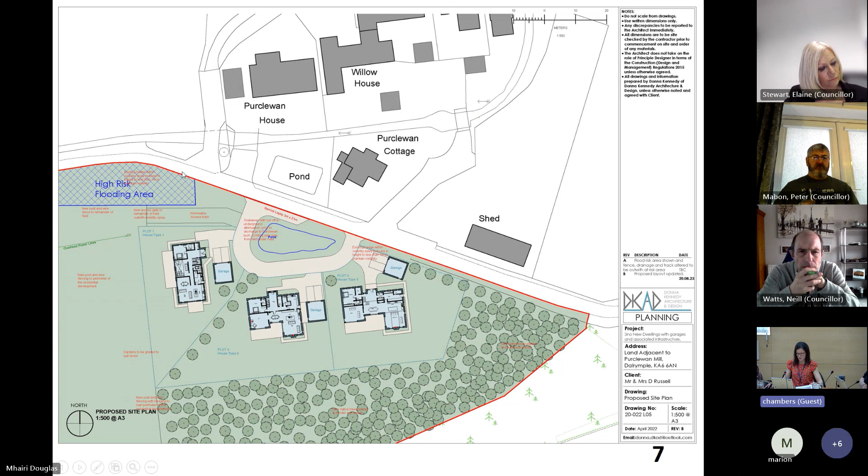Each application should be considered on its own merits, but it is noted that the plot sizes and footprints are smaller and sited at a lower elevation to the road, generally relating better to the existing cluster at Purclewan Mill.

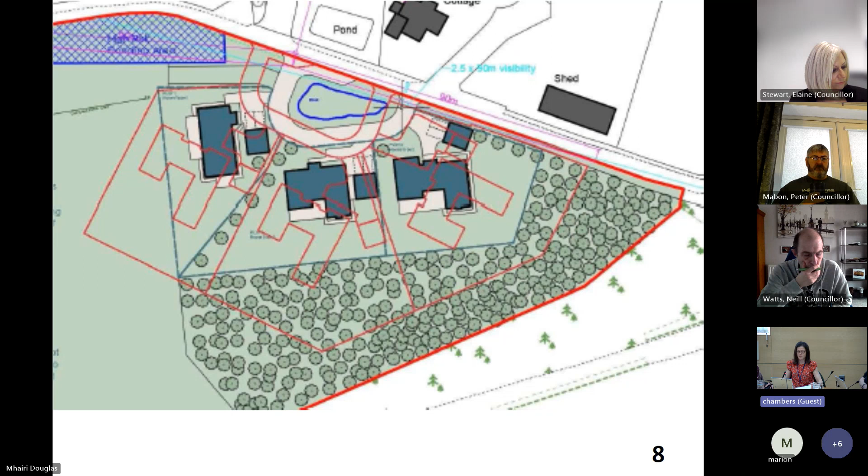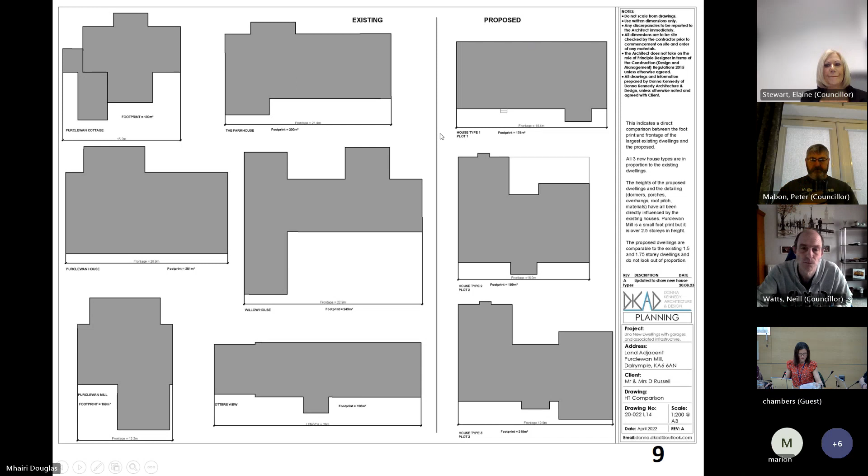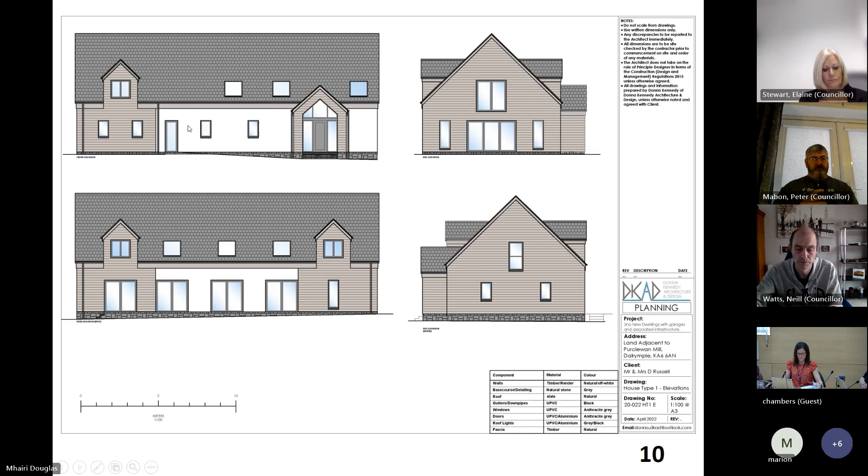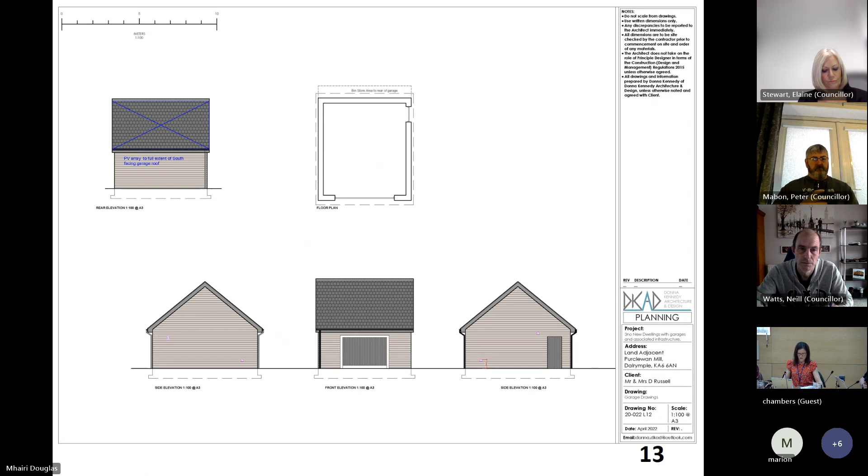This just shows the garage which is proposed to each of the plots.

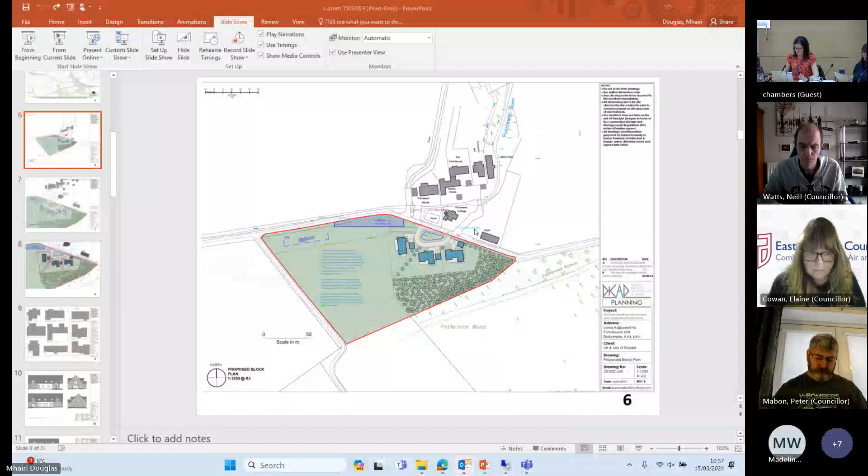This is the application site. Some objections were regarding the size of the application site — it is a very large site, outlined in red. However, the plot boundaries are those outlined in blue, which is a lot smaller than the application site itself, and this remaining field would remain in agricultural use. So it doesn't prejudice any future proposals or mean there's more chance of planning permission being granted for more houses. It simply seems to be the way the application site's been drawn, based on what was previously drawn, as the applicant says.

You can also see this is the area of the SUDS. It's proposed that surface water coming into the plots from the field would be trapped and drained along the boundaries, and surface water from the hard surfacing of the plots would also be trapped and drained. The water would go into the SUDS pond and eventually drain to the burn.

So SEPA Flooding have been consulted on this. They are content with this, subject to the final detail of it. The discharge rate would have to be limited to, I think, 4.5 litres per second as a flow rate going into the burn.

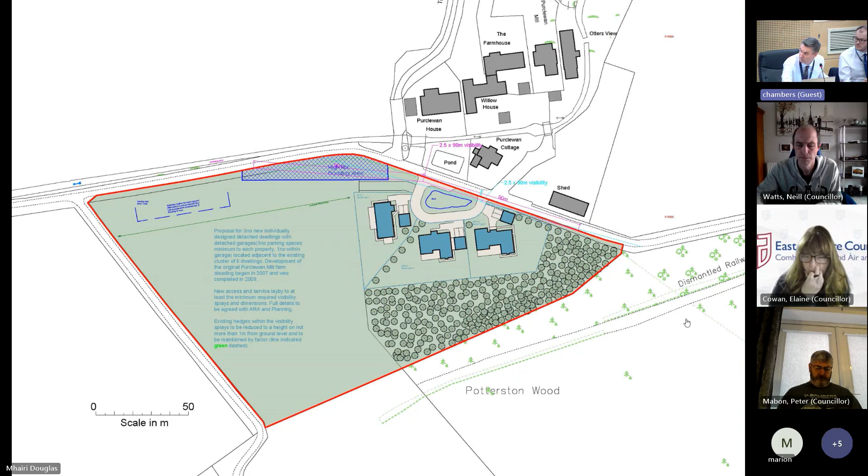I think that probably covers most things I wanted to say. So yeah, that's it for me. Thank you. We'll just hand over to our colleagues, maybe a couple of minutes to get through that. Yeah, thank you, through you, Chair.

On the speeding on the road - if there were fatalities or near misses, we would have been notified by Police Scotland. We haven't got any data to indicate that. If you mention it getting up to a speed of 60 miles an hour, I can't see it getting up to that speed, but what we can do is put a speed survey in. The speed survey will indicate it, and if it does show excessive speed, we can put in traffic calming measures, should the application be approved.

So we haven't got data to say that there's been any near misses or fatalities, but if there were any fatalities, we would have been advised by Police Scotland to put traffic calming measures in. Again, we can put a speed survey out to monitor it, and if it shows excess speeds, we can organise traffic calming measures to be put in to reduce the speed.

Regarding the flooding, colleague is correct. It is a positive drainage system that will reduce the flow, so we have no objections towards that. I did note about grit boxes. We have got community grit boxes, so the community can apply to get the gritting boxes put out, so we comment there. But other than that, we are happy with the application. We've got no further objections.

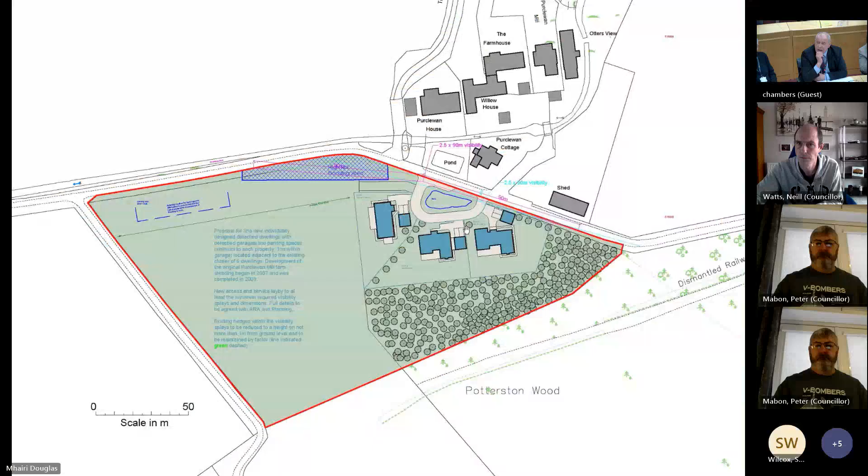I was disappointed to see the site visit had been stood down the other day, so I took the advantage to nip in myself, and I left it to night time just as it was getting dark, and I stood. Could you put the site up again there, please? The closer one, if you can. I think you've got one that's closer than that. No, there was one earlier on. I think it was the one showing the site before and the site now. That one. Did you bring that down a wee bit, actually? Oh, you can't do that.

Basically, I was standing there on house number 2, and I was looking back, and the nearest cottage is Purclewan Cottage, just the one you can see at the very top there. And I guess the lights were on them both upstairs, and I think the one to the left is actually a bathroom, and the one to the right is a bedroom with a balcony on it. I could see people in both of them. So that privacy issue was a thing for me, and especially at night time, I could see it much better when people were actually in the buildings, in their rooms.

Thanks, Chair. Purclewan House added a Juliet balcony recently, maybe about 3 or 4 years ago, so they will have open views there, but as you say, they might not have curtains up at the moment because they've got no neighbours as such, but they do have a big glazed area that they can look out of. If I can add to that, the separation distance between the houses would be more than sufficient in any normal situation, even in an urban environment, in terms of window to window distances. So in terms of actual privacy impact, that in itself wouldn't be an issue for us.

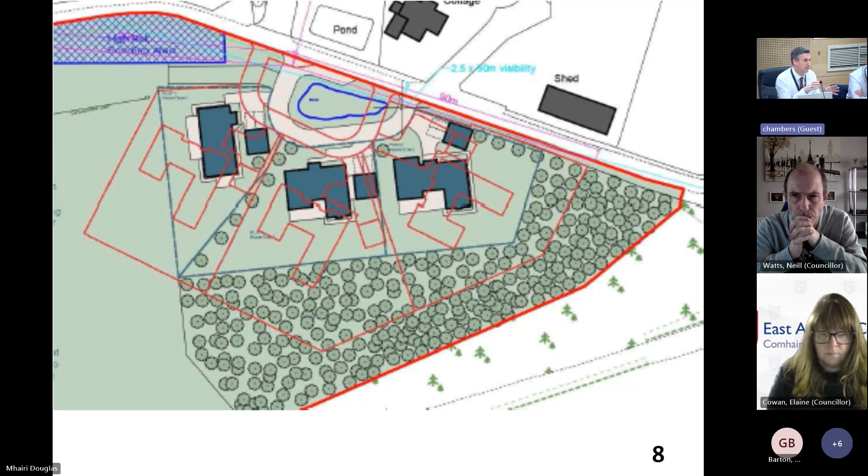Thanks, Drew. Just on the site visit, Councillor Wilcox, that's a proposed date in the diary, and it's kept there as a holding date, and if any committee member asks for it, then we go ahead and book that, but there was no request come in, so it wasn't really stood down as such.

Thank you. In relation to Purclewan Mill itself, it is very much an old steading that's been done up, and it is very close together, and there are no spaces for new builds within that area. The area that you're proposing to say is an extension to the hamlet, it's essentially a new build, not essentially part of Purclewan. What we're looking at is actually 3 new builds which are purporting to be part of Purclewan Mill, but they're separated by a road, and there are clearly definitions there.

It really is part of a new build, so I would suggest that a site visit would perhaps be in order so that people could get a handle on exactly the layout of this, because it is at this moment agricultural land. From the B742, there will be a visual impact on the rural area. And as I say, I don't see it being part of Purclewan, I see it being 3 new build houses. And I would second that, Chair.

So, Councillor Hogg, you were asking for a site visit, and Councillor Wilcox, you. So we've got that on the table at the moment. Chair? Yep. Why was there no visit? Nobody wanted to go. So nobody wanted to go. Why do you want to go now?

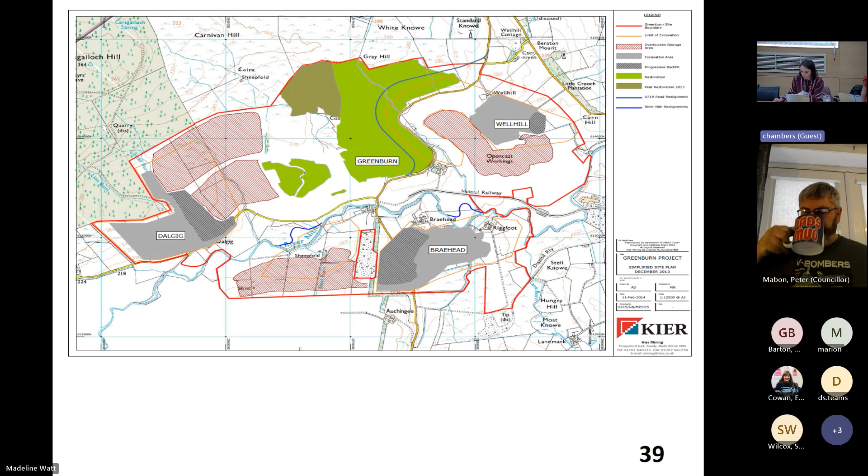Here we can see the location of Greenburn coal site outlined in red, with the 3 areas: Dalgig, including Greenburn, Wellhill, and Braehead to the south of the road.

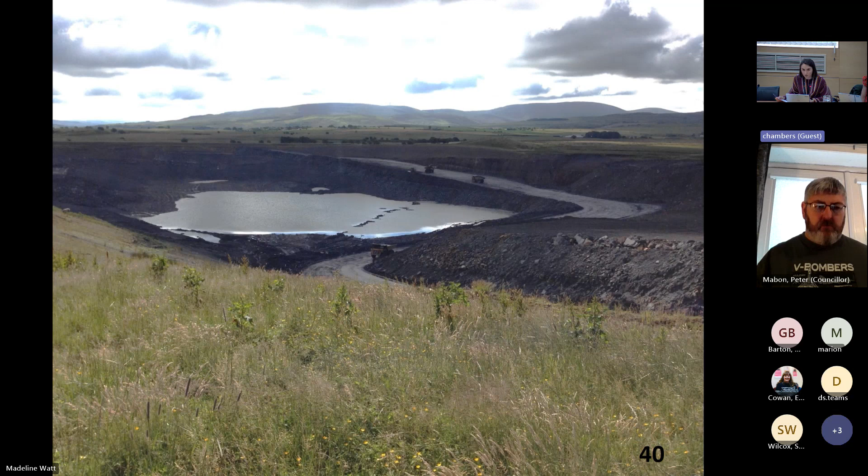Moving on to some photographs. This slide shows Braehead Void in 2016. Coaling was suspended here in 2015 and the area was restored between 2017 and 2019, the results of which we can see here. The void was infilled and the final landform, relatively flat at 197 metres AOD, was completed in 2018. The area has since vegetated and naturalised. A tip to the west of the void has been regraded down to the reinstated road, with slopes of 1 in 5 to 1 in 50.

The common boundary was largely worked and reinstated by Hargreaves as part of operations at the House of Water complex, but on the Kier side, the Dalgig void was reinstated to create a water body using backfill materials from the tip area. These works were completed in 2017, and the water body is surrounded by graded slopes ranging in gradient from approximately 1 in 3 to 1 in 10, with no exposed rock face. The area is well vegetated, and groundwater is considered to have rebounded and is fluctuating seasonally. Signage and life-preserving equipment have also been installed.

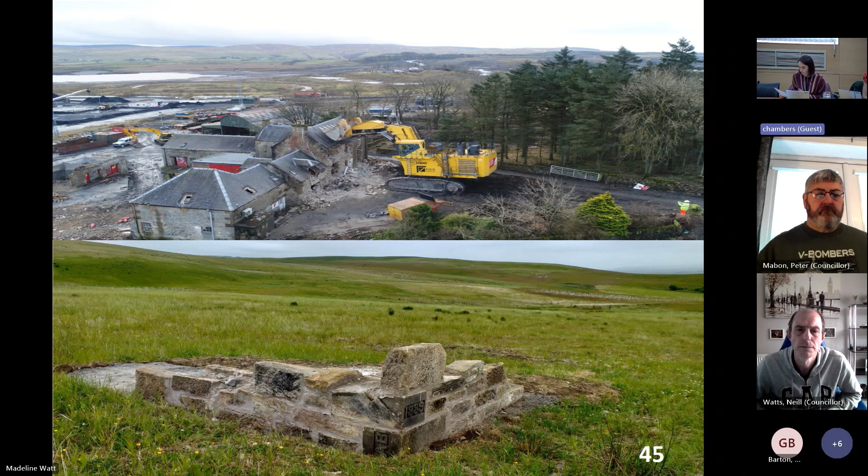This shows Auchincross Farm at the top, and the bottom is the site as it is now. In 2017, an extension referred to as the Auchincross extension was approved, which included the demolition of Auchincross Farm. Construction materials from the farm building were retained for the installation of a farm marker at the location where the farm once stood, and the area was restored as part of the Wellhill operations.

From 2022, the operator has been undertaking structural surveys of the twin culverts that form the underpass to assess its current condition and any remedial actions that might be required.

With regards to it not being restored yet, East Ayrshire Council have over the years agreed to multiple extensions in time via exchange of letters and emails, in line with the provisions of Condition 1 of the relevant planning permission. This facilitated the operator's ongoing discussions regarding potential future land uses and potentially retaining the infrastructure. The most recent extension expired on the 1st of January this year, and as the infrastructure had not been removed and the area not restored, the operator submitted a Section 42 planning application to East Ayrshire Council in December 2023 for a further extension in time to delay removal of the infrastructure. This is currently pending consideration and will be presented to members in due course.

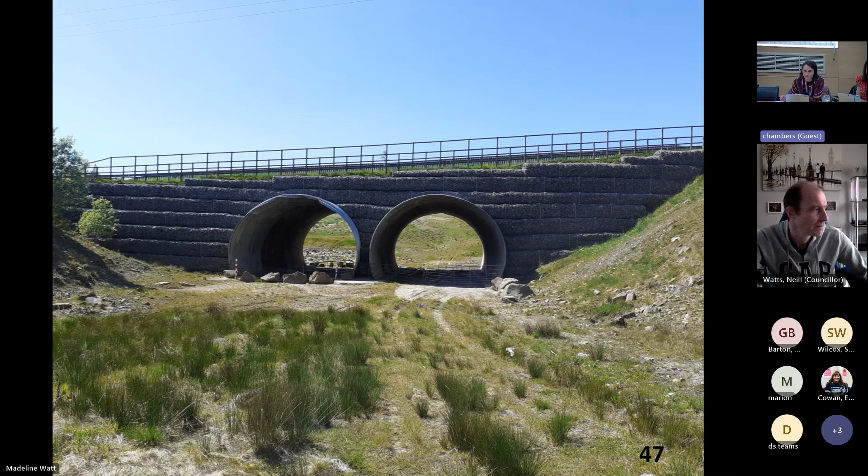I can just clarify that as part of this Section 42 application we're currently considering for the interim retention of the underpass and the railhead, ARA have requested some further structural surveys of the vehicle underpass from the operator. We've advised Kier of that, and I think they are planning on providing that with us. I think they've also been in contact with Brockwell, because the turbines are potentially going to be coming over that road. So it's something that's been noted, and Kier are aware of it and are taking surveys.

I don't see anyone online requesting to speak, so I'll be happy to note the contents of the paper.